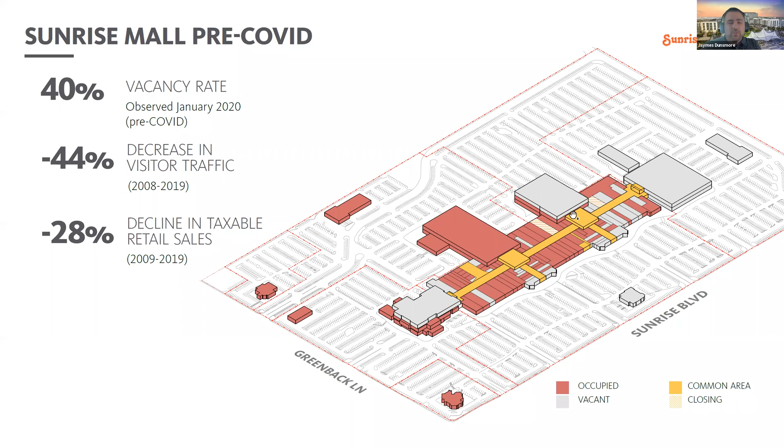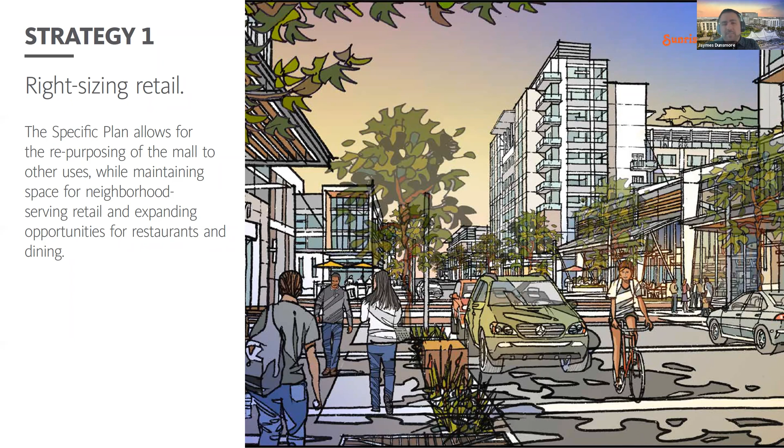So how are we strategizing around that? Really, the answer is about right-sizing the retail. What the specific plan will do is allow the mall to be repurposed for other uses while maintaining space for neighborhood serving retail and really expanding opportunities for restaurants and dining. So the mall will continue to be a destination for people to go and shop, with even greater focus on the types of shopping that people in the community need as residents come here, like grocery stores and things like that, and lots of opportunities for eating and drinking.

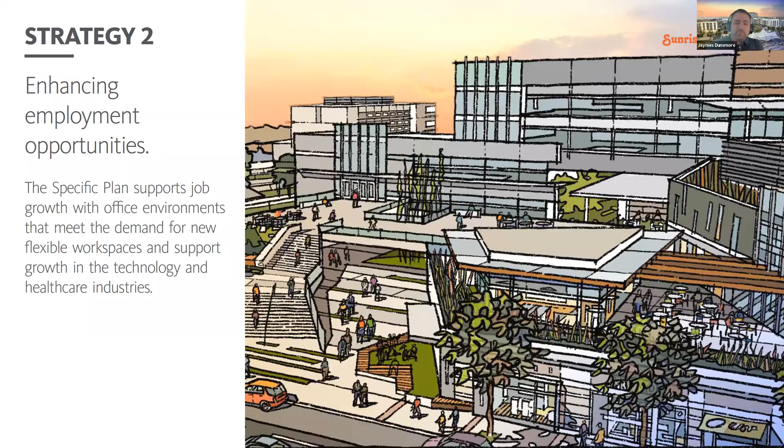Our next survey question is about how much you anticipate, if employed, going back to the office. Will that be 5 days a week back in the office just like before? Will it be some sort of hybrid? We have a number of options in this survey to dial in where you think you'll be, or will you remain remote 5 days, or is it not applicable because you're retired or do not work? I'll give people a couple minutes to answer this.

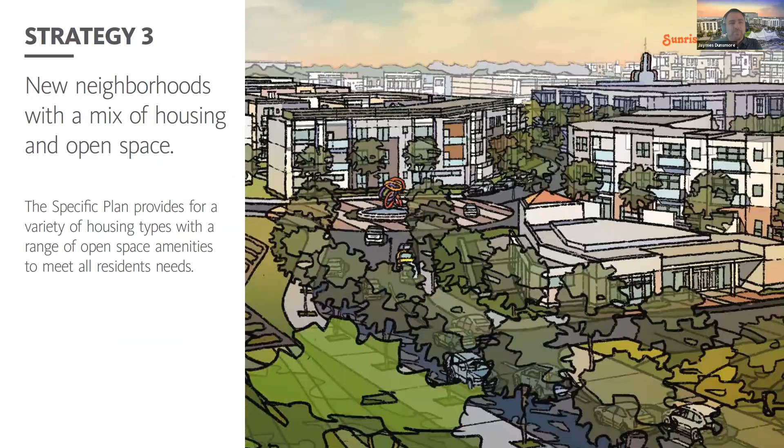Great, thanks Jaymes. That leads us to our third question about COVID trends. I think we've all spent a lot of time at home. So as California reopens, what features of your neighborhood did you find were really important to you during this last year and a half? Was it walkable streets, shady, comfortable, safe? Or parks and open spaces within walking distance of your home? Or restaurants and shops within walking distance of your home? Or community gathering spaces nearby? You can check all that apply. I know a lot of us probably value a few of these, so it's not just a one-shot answer.

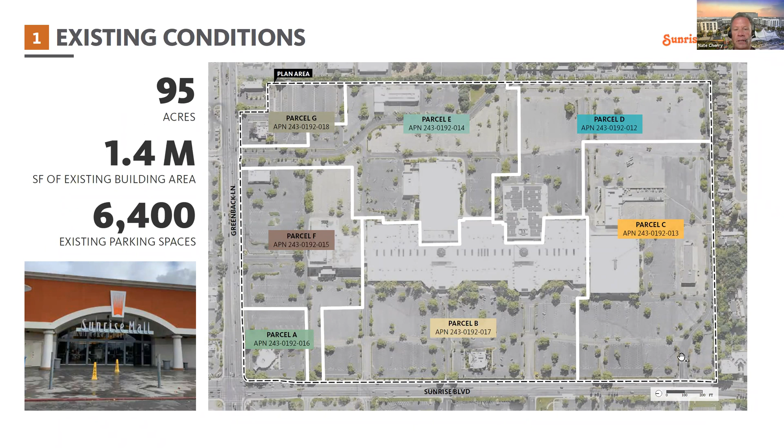The city, the community has always been very results oriented, and the result of that has really been co-authorship in a plan with key elements. The earlier poll said 71% wanted walkable streets, and that's exactly what this plan represents: several miles of blocks and streets which break up that super block of 95 acres and turn it into a city, a series of blocks and squares and green spaces that connect into and through the existing fabric of the city.

Several key elements: number one, the main street, which goes through the center of the project, designed like a classic main street you'd see in a traditional town, recapturing some of that traditional feel Citrus Heights used to have. Number two is the Commons, a community living space that becomes an anchor for community-oriented uses. Many people told us about the fireworks activities, the farmers market, and other activities on the site. Now you'll have a space where that happens on a formal, legitimate level that becomes a real anchor.

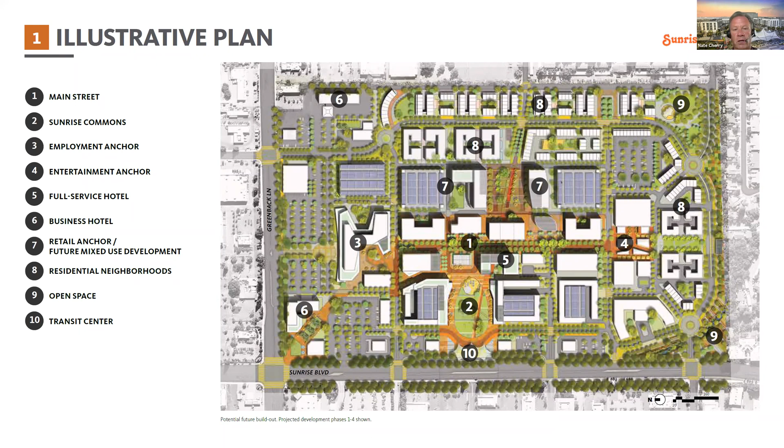Employment on the north side, entertainment on the south side including a full movie theater and other entertainment uses, business, hotel, retail interspersed throughout, and residential neighborhoods connecting on the east side and around the Commons, with 5 or 6 different residential typologies integrated into the plan, plus open spaces. Importantly, the use characteristics of these land uses allow for dispersed traffic throughout the day, and mitigating that traffic are connections to the transit center on the west side—an important connection that goes all the way through the site, with a transit mall on the west end of the site.

So the vision for the project, to back up a little bit—people use this term 'heart' all the time. The idea of the mall was the heart of the city, and really creating a new heart that expresses the changes in the culture, the changes in our behaviors and the way we interact with each other. That's really what this is all about. Next slide, please.

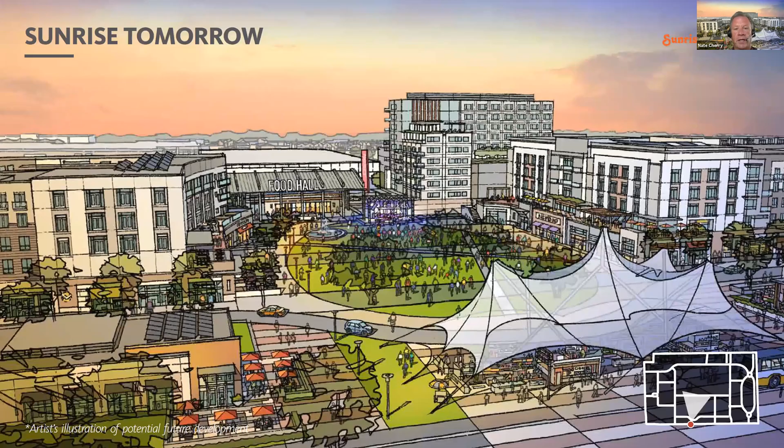There are really five big ideas that deliver on that vision. I'll talk about the first one and the last one, then get help on the other three. The first idea people talked about was creating a big heart, a community and regional destination that appeals not only to locals, but becomes a real activity center for visitors or people staying in Citrus Heights.

We talked about multi-generational families, and that's what this represents: Sunrise Commons, a large community green of about 2 acres, a food hall at the end of the commons, an event tent in the foreground connecting to transit, indoor-outdoor dining allowing a lot of choice, and residential uses above shops looking down into that community gathering space, with diversity of retail and a hotel in the distance.

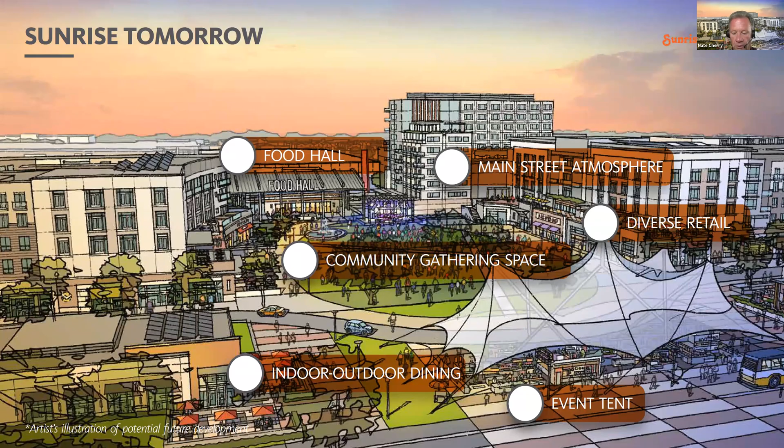So we're really talking about classic all-American placemaking and a real heart for the community. That's what this is all about. Next slide.

Many people talked about this nostalgia for downtown and their desire to see it become a hub again. This is part of how you do that: you create the space, you get the land uses around it, and then you create the events that bring people together.

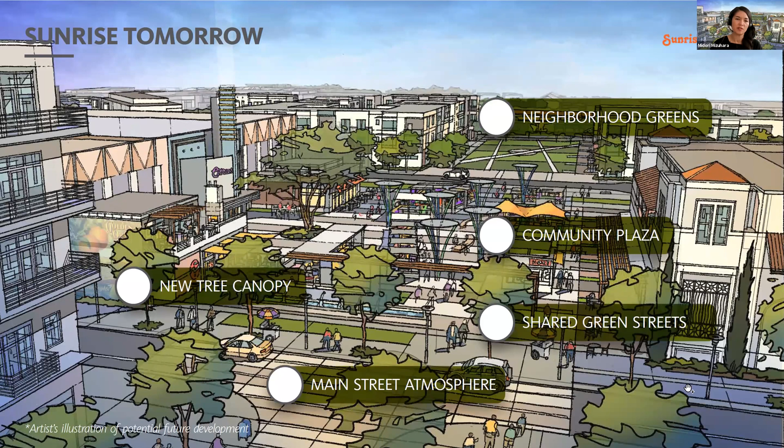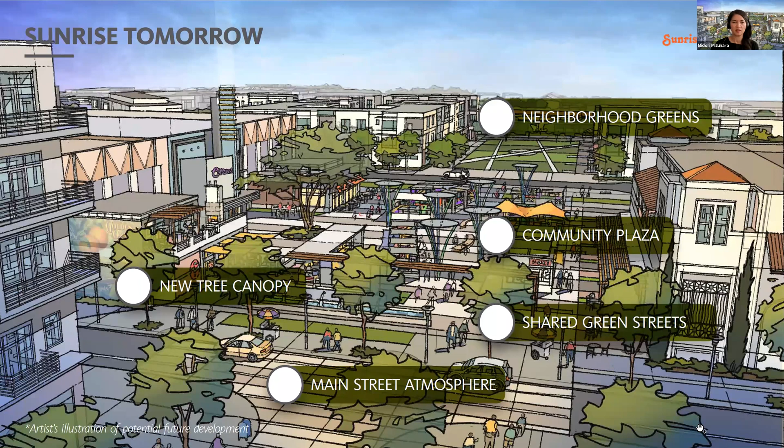Second big idea, I'd like to pass to Midori. Thanks, Nate. The second big idea we're calling Green Network. As the site has been covered by concrete for decades, what does it mean to let nature back into the site? Shaded public areas activated with great events, family-friendly plazas, verdant parks, shaded streets—natural systems throughout, a sustainable site offering new tree canopies along all the streets in the Main Street atmosphere, and a mixture of hardscaped plazas and green parks with lawns to play.

A ton of different open spaces, but having nature really welcomed through the site for a sustainable lifestyle. What are some of the metrics from that? 25 acres of potential parks and green space, up to 30% active open space on site, and 1.5 miles of potential multi-purpose paths. We're offering a green loop around the site so residents can easily and safely walk around in a beautiful landscaped path.

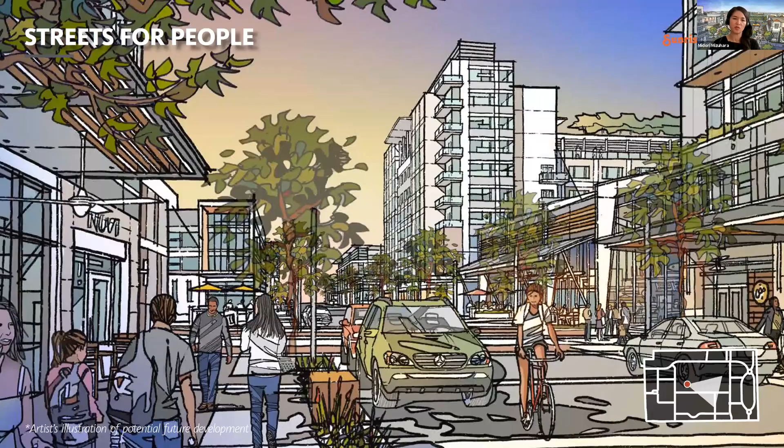And that brings us to our third big idea, streets for people. How do we make all the streets and block structure in this new village safe and accessible for all? How do you feel comfortable walking with your kids, biking with your kids through the site, walking and biking throughout all the plazas and streets safely and enjoyably?

It not only needs to be safe, but it needs to be interesting. There needs to be public artwork, captivating things to stop and do and see and smell along the way. We want to make this a really vibrant place to walk around and discover new things. So we're offering flexible streets that can be closed for events. If there's a community festival on Main Street, we can close it down and have a block party, sidewalk dining, diverse mixes of uses spilling onto those streets, cafe seating, making those streets interesting places to stop and talk to neighbors and meet new friends, shade trees and wide sidewalks, just to make being a pedestrian comfortable, enjoyable, and fun.

And some of the metrics that come out of the streets concept: a quarter of the projected trips are walking, biking, or internal. Over 80% of the site was within a 5-minute walk of transit, which is great. We have a park-once strategy, so if you park on the site, you can walk and circulate through the whole site comfortably. Again, those shaded trees, those safe streets, those wide sidewalks make that possible, and there's a 30% savings in number of parking spaces with that shared parking strategy.

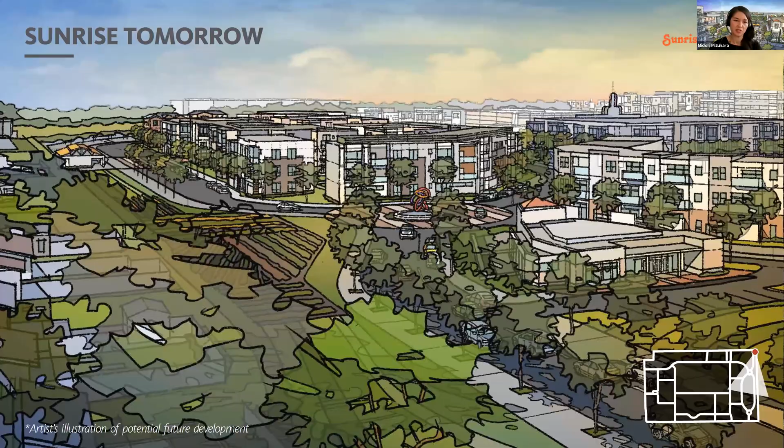And this is just a view of one of those neighborhoods. But as we mentioned before, we have a variety of different housing typologies for every demographic, mixed use lifestyle, different densities for different demographics, active adult, townhomes. So depending on what phase of life you might be in, what you're looking for in housing, there's a wide variety for a diverse set of residents here.

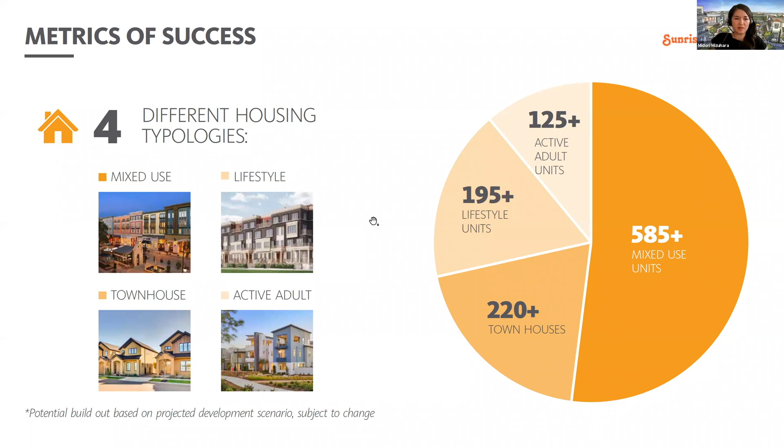And then that leads us to our last big idea, economic engine. I'm going to turn it over to Nate again. Yeah, thank you, Midori. So this is all great, but the question arises, how is this all going to be paid for? And what are going to be those big economic levers that are going to be pulled in order to make that all happen?

One of the things that's really important to understand is what's happening in the Sacramento region. There's so much growth with millennials moving to the area, empty nesters and second home buyers who are interested in Sacramento as a lifestyle play, and many economic sectors that are really interested in the area: biotech, the service sector, construction, design and advertising. There are a lot of different entities moving and really interested in Sacramento.

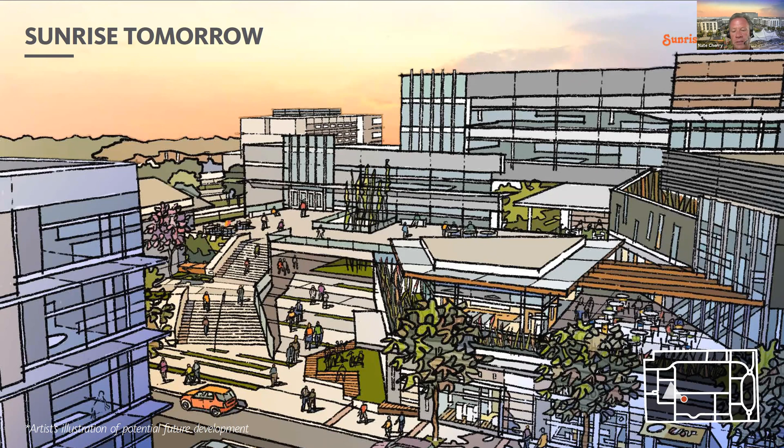So the question is, how is Citrus Heights going to get more than its fair share of that economic piece of the pie? The way it does that is by creating compelling urban spaces that attract creative businesses and industries that focus on collaboration. And that's really what the design of, for example, this corporate office piece offers.

At the end of the main street, it incorporates creative office space, an adjacent hotel and food and dining and terraces that look out over Main Street, a walkable and connected environment with a beautiful streetscape, public spaces, public artwork and events, and immediately adjacent housing, affordable housing for workforce, market rate housing that accommodates a variety of different lifestyles and different ways of working, people who want to work from home, who want to be in a creative environment. And that really helps to attract those core industries we're talking about.

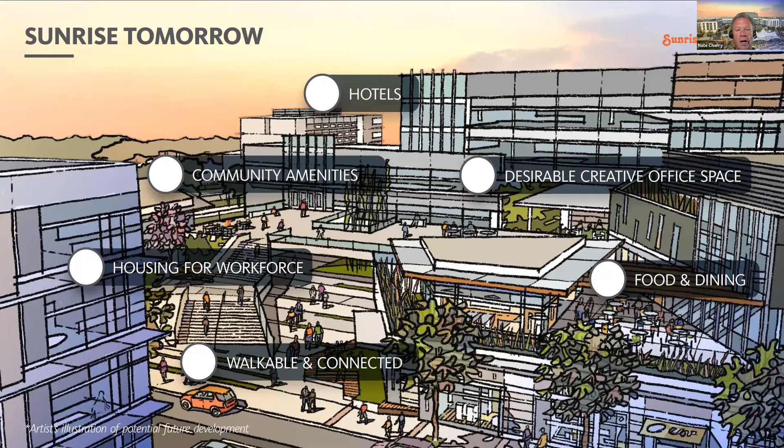So what you really have here is an incredible economic engine that's going to help pay for and subsidize all those great lifestyle elements that everybody wants to see on the site. And that's really important. So how do you do that? You do that through creating great places. And this just shows the plumbing of how that gets done.

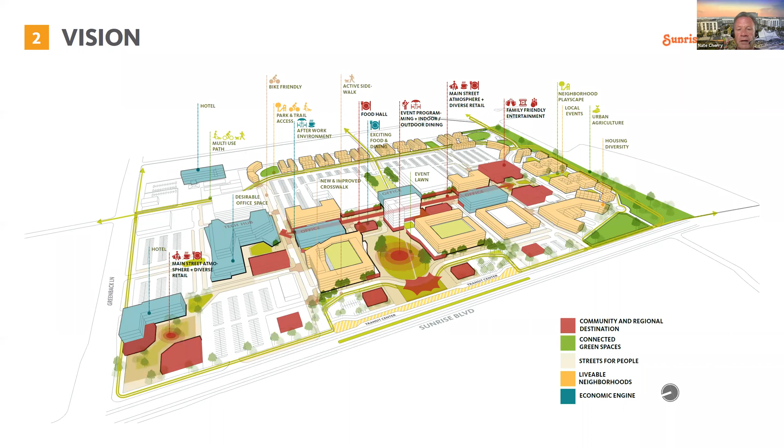So integrating land uses that create great public spaces, great placemaking, and then event programming within those places creates all kinds of reasons for people to come here throughout the week, during the evening hours, and during the weekend. You're really creating a community heart that not only creates an economic engine, but also improves the quality of life for everybody associated with this project.

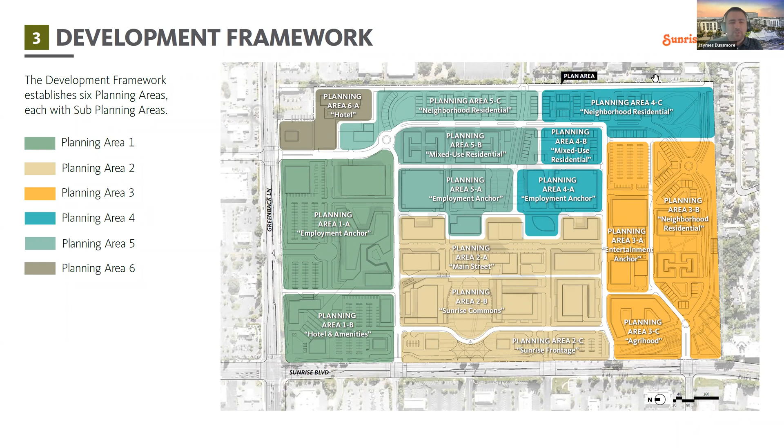In terms of what's actually going to be allowed to be built on the site, that's one of the things the specific plan will govern. The plan will set a maximum development allowance, both for each planning area and for the site overall, and will set development allowances by use. So there'll be a fixed number of residential units, hotel rooms, retail, office, and community institutional spaces. The plan does allow flexibility, so if there's less demand for office or hotel in the future and more demand for residential, there can be some shifting of uses within a specified framework.

But if you'd like to see this in more detail, you can check out the plan document itself on the website and delve into all the metrics for each of the planning areas.

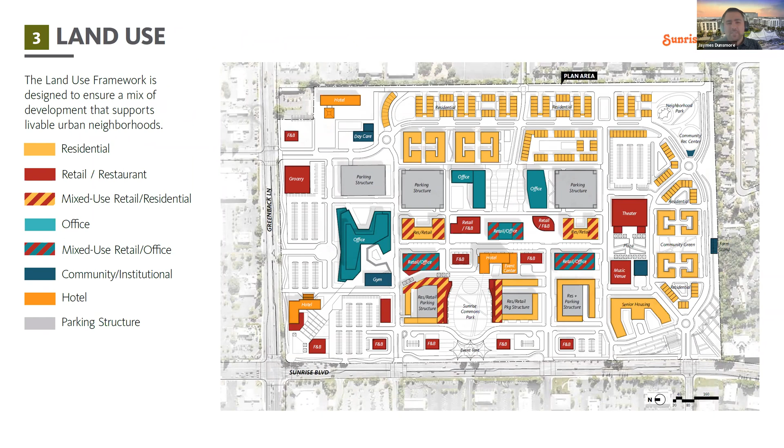One of the other things established in the plan framework are some of the overall policies and requirements across the site, for things like land use and the types of uses allowed, as well as for mobility—setting up an overall site-wide strategy for how people will move around with sidewalks, pedestrian paseos, the green loop that will connect all around, and transit.

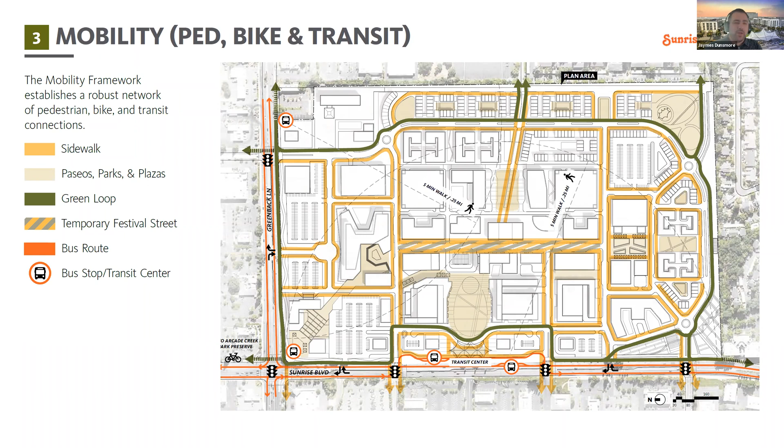So this chapter includes both these plans, as well as a wide range of policies that speak to the different things the city wants to see as the site is developed.

You can take a look at this chapter of the document, which has a specific policy on minimizing impacts to the surrounding community—requiring a greater setback adjacent to the southern edge of the site, where there are existing residential units and people's houses close by, and requiring things like sound walls and noise mitigation in those places.

So all of that's included in chapter 3 of the plan, which covers policies and framework.

Going a little deeper, chapter 4 includes the development standards, organized for each specific planning area. Take, for example, planning area 2, right at the center of the site with Main Street and the Sunrise Commons. For each of these planning areas, you'll see a description that talks about the intended character of this planning area.

In this case, planning area 2 is really envisioned as the mixed use core of the site, the area with the highest level of activity and the greatest intensity of development. You can see the summary of the development allowance for this area and an illustrative plan showing how development might occur in the future.

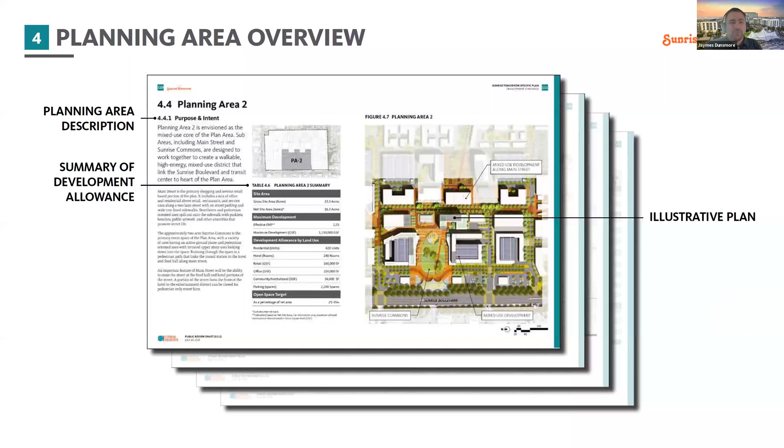Going into more detail, each of these planning areas is broken up into sub areas. For example, we're looking at the sub area that covers Main Street. You'll see the description of the desired character, precedent images showing the types of development and uses and activities envisioned, as well as a 3D diagram showing potential development with a description of key elements the city would want to see when a proposal came forward for development in this area.

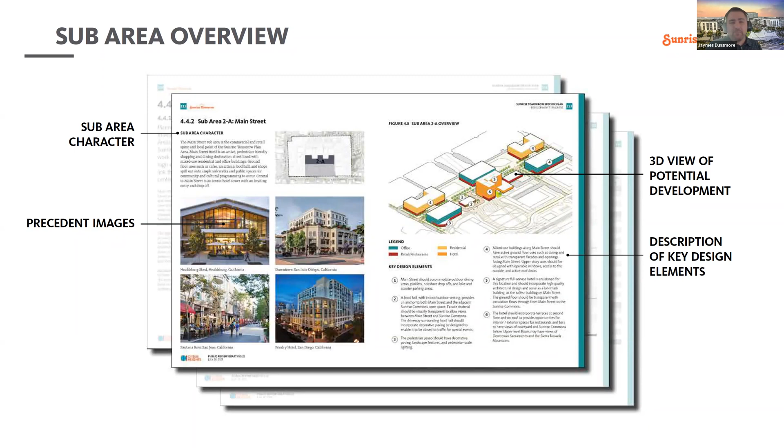Along with these requirements, we have things like height requirements and setback requirements. For each development site within the plan, there's an established height limit, in some cases both a minimum and maximum number of floors. In general, greater heights are allowed toward the center of the site, and lower heights toward the eastern, western, and southern edges, closer to the existing residential neighborhoods. This also includes setback requirements, from internal streets, internal public spaces, as well as from adjacent property lines.

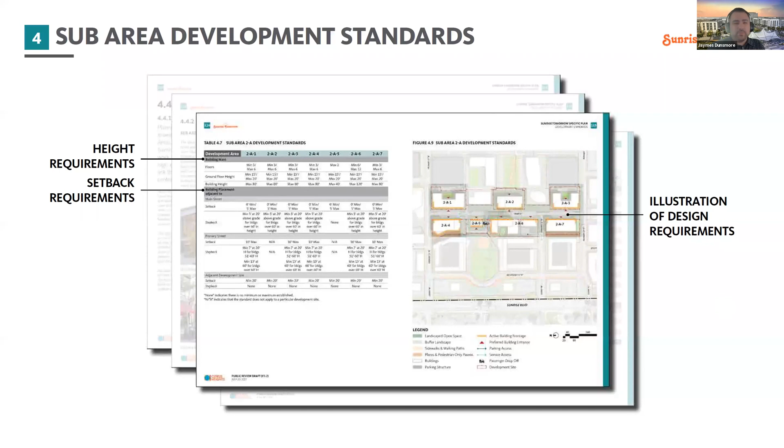Finally, as part of this chapter, there's a use table that details for each development site within the plan all the types of uses that are allowed. So you can look at a particular parcel and see, for example, would this place be allowed to have a restaurant, or would it be allowed to have an office building? This shows the types of things that could occur.

And just like the city's overall zoning, it includes things that are both permitted outright and things that require a little greater level of review with a minor use permit, or special regulations for some types of uses, like those serving alcohol.

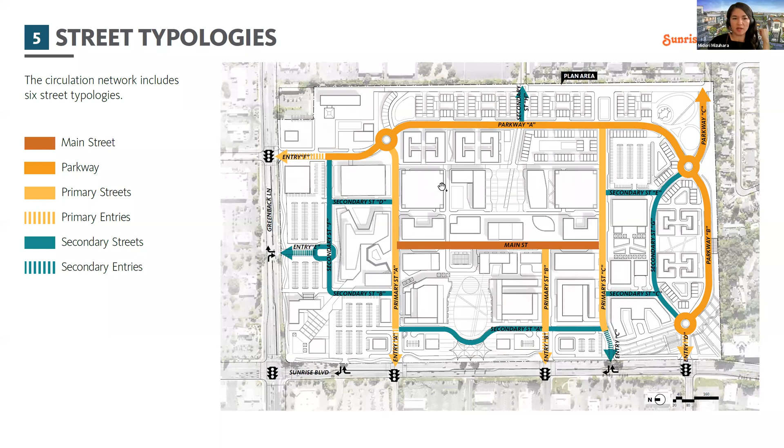Thanks, Jaymes. Continuing along the chapters of standards, chapter 5 describes street standards. To create this walkable, small scale block structure that's easily navigated by foot or bike, we have a number of different street typologies, from main streets to parkways, primary streets and secondary streets. Different streets have different intensities—some higher traffic, some more quiet. The color coded overall map outlines the types.

In the pages of street standards, just like Jaymes's development standards, we go through how wide the street is, how the street trees are being treated, what is the character of that street, and some precedent images to give you an idea of what that street might look and feel like. Then a plan and section on the right-hand page give you dimensions and more detail.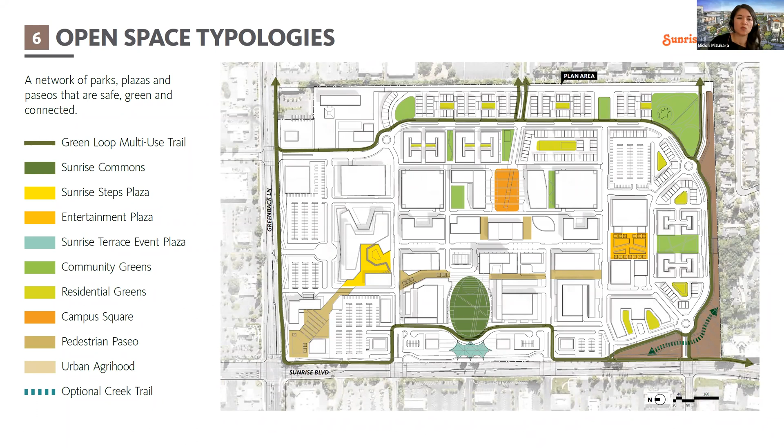On the next page, you can go through the plan and see what each open space will look and feel like, and the materiality—whether it's hardscaped or green space, what kind of amenities might be in that space, whether it opens to restaurants, and whether it's more of a quiet space or a more active space. So you can really get an idea of what each of these parks and plazas will feel and look like.

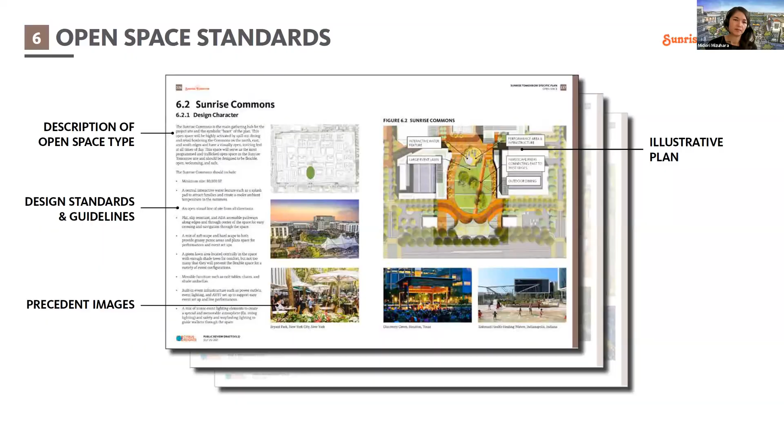I know that was a lot of content. Chapters 3, 4, and 5 really speak about standards from development to open space to streets. Are there any questions? If so, click the Q&A tab at the bottom about standards in general, or the framework policies that Jaymes went over.

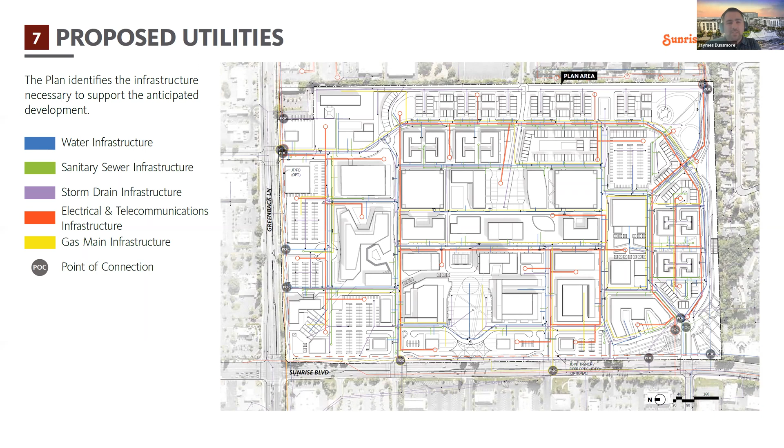This chapter goes into detail on each of those systems, and you'll see a description of existing conditions, proposed conditions, other considerations, and for each utility, calculations of the projected demand. As part of this process, we've worked and reached out to each of the different utility providers—the water district, the sewer district, the electric utility, PG&E for gas—to make sure there will be adequate capacity and provision of resources for all the development on the site, and that it fits within their overall plans for development.

And then finally, the last chapter is about implementation and administration, the rules for how the city will use the plan, how it will be adopted, and how it will be carried out. This also covers the phasing plan. As we mentioned, this is envisioned as a long-term strategy for the city, 20 years or more potentially.

And development won't all occur at once. We're envisioning that it will occur in multiple phases as the mall site is redeveloped and changed. So you can see here one example of how phasing might work. What we're anticipating in phase one, in the first 5 years or so of the plan, is really things that are ready to go today.

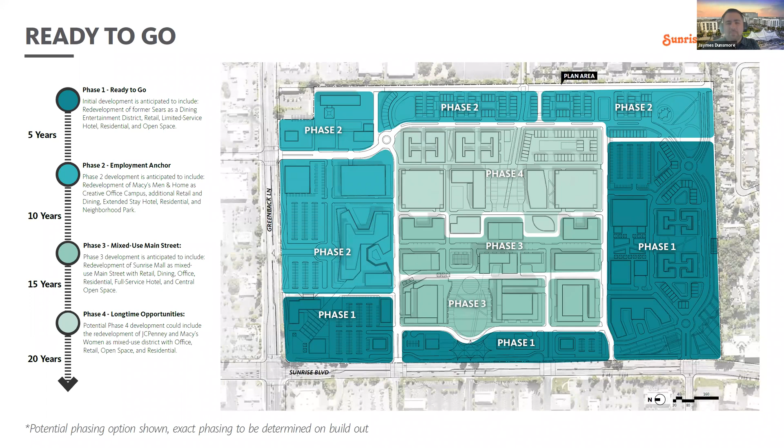And then as you go through future phases, we'd envision the employment anchor coming online, more housing, mixed-use Main Street in later phases, and finally, potentially the redevelopment of the existing anchor retail stores, the Macy's and JCPenney's.

This chapter also talks about some of the potential implementation tools that could be used for how the city is going to encourage development and make it happen. Projects like this are complex and require a lot of coordination in order to be carried out successfully.

One of the first pieces is streamlined regulation, and that's really what the plan is all about. It's creating a set of rules that is clear for everyone, so the city knows what's expected, developers and the mall owners know what the rules are for them, and the city and community members can know what types of things will be allowed and what's going to happen.

Catalytic projects are those types of things that come online in early phases and really jumpstart the overall development. That could include things like some of the open space or transit center, things that will be a destination and really draw people there and support some of the other types of businesses.

There are lots of different ways that these projects are financed, particularly the infrastructure. So there could potentially be grants or other funding mechanisms to help the city build some of the infrastructure. Some of this will be privately financed. There may be some that's public or public-private partnerships, partnerships with other agencies, including RT, Regional Transit, for some of the transit improvements.

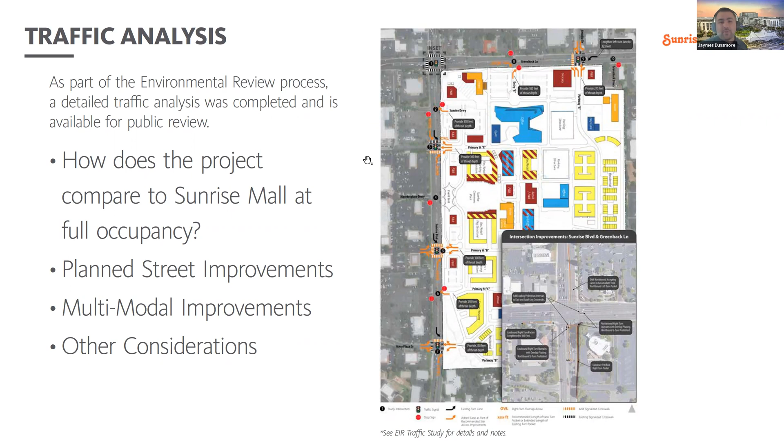So I'll turn it over now to Nate to talk about some of the final takeaways from the project. Thanks, Jaymes. I think the most important thing is, if we're talking to city council members or just over the kitchen table, we need to ask ourselves why we're going to all this trouble and what are the benefits of a plan like this.

I think there are 7 really key ones to think about. One is the project generates a ton of jobs -- direct jobs through construction, indirect jobs through people who provide goods and services to the people building the project and who work in the buildings, and induced jobs related to the project itself that create employment. It's a very diverse project with a lot of short-term, mid-term, and long-term job creators, which I think is good for Citrus Heights and will not only replace the mall, but supersede what the mall ever did in terms of creating a tax base for the city.

There's also a tremendous mix of housing -- at least 4 different housing typologies that really fill in the missing middle, or the gap in housing types. Many people have come up to us and talked about affordability being a real issue, and the ability to have housing that can accommodate their kids or their parents. I think this plan really addresses that need.